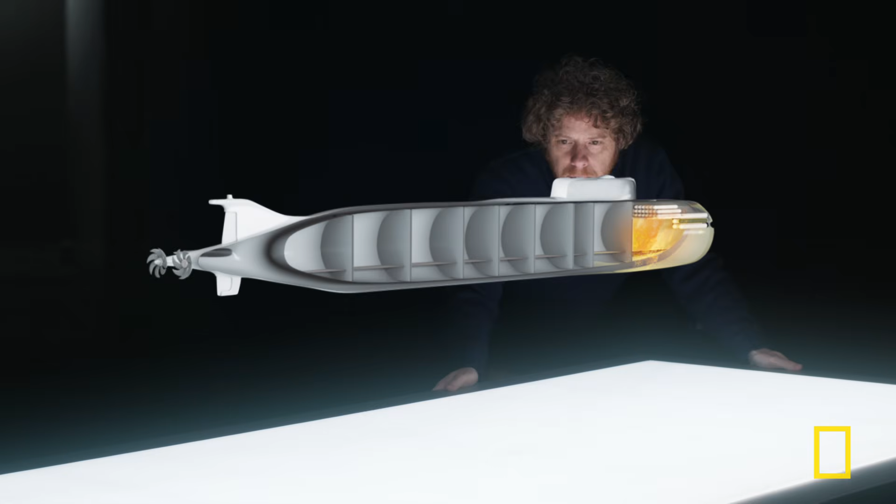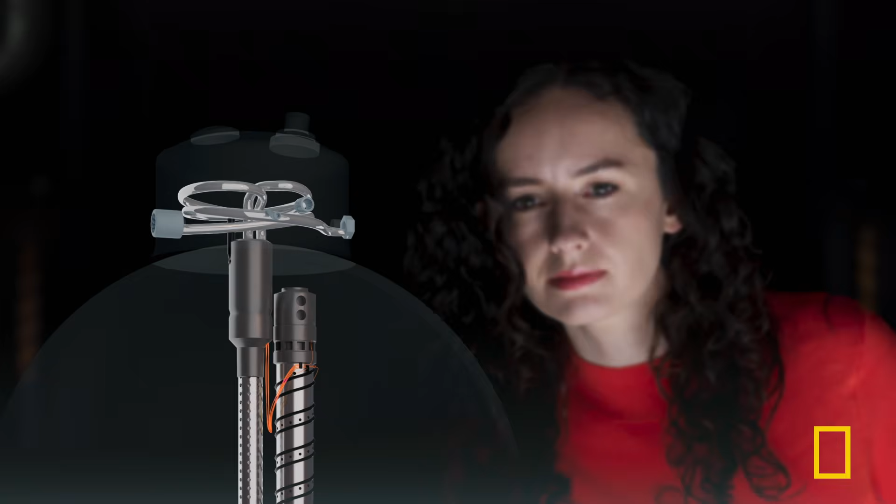Now, combining the latest research with every available source of evidence, experts will forensically analyze 3 disasters down to each tiny detail. You've really got to think outside the box. You have to work your way back and understand each link in the chain.

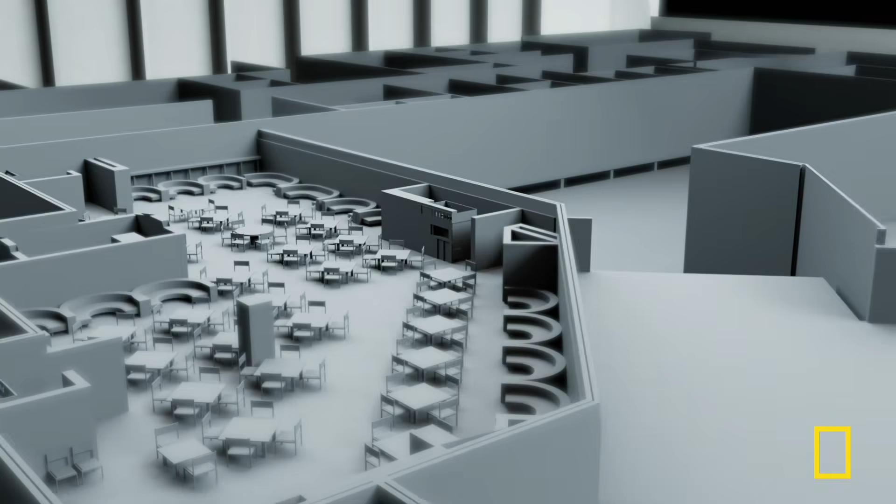State-of-the-art graphics reveal every critical detail at every critical moment. This whole disaster could have been averted. We can dissect them, get inside, or underneath, freeze time, and even reverse it.

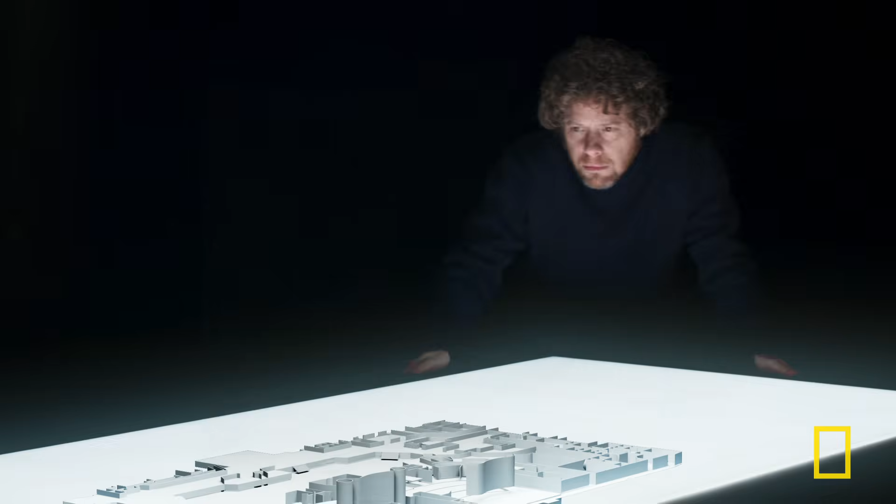To conduct a complete disaster autopsy.

Europe, the Alps. At 15,766 feet, Mont Blanc is Western Europe's highest mountain. Deep inside the solid rock runs a road tunnel more than 7 miles long, connecting France with Italy.

When it opened in 1965, it was the world's longest road tunnel. There are 2 carriageways about 12 feet wide, and you'll be able to drive under Mont Blanc in less than a quarter of an hour.

By the late 90s, about 2 million vehicles were going through the tunnel every year. The tunnel is carefully designed to keep these drivers safe. There are smoke and heat detectors throughout the length of the tunnel, refuge rooms with their own independent air supply.

We also have emergency telephones and fire extinguishers at regular intervals. Even today, the Mont Blanc Tunnel is an extraordinary feat of engineering.

But on March 24th, 1999, the safety systems fail. A lethal fire breaks out deep inside the tunnel.

It took more than 2 days for it to be put out. 39 people die. It is one of the deadliest road tunnel disasters in history.

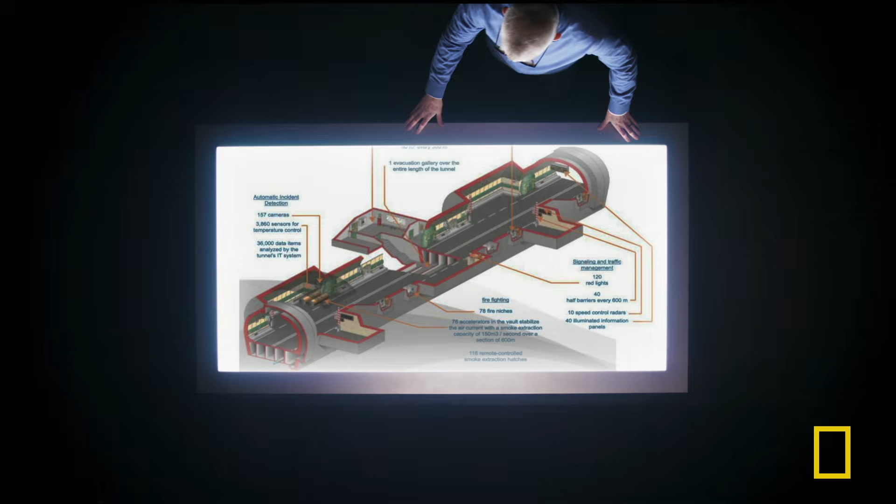Now, by analyzing all the available evidence, we will digitally reconstruct the Mont Blanc tunnel disaster to answer the question: what went wrong?

We have a range of evidence that we can look at to understand this fire. There's the remains of 36 vehicles that were left inside the tunnel after the fire. We have eyewitness accounts, and we also have data from an array of sensors that were located within the tunnel.

The first evidence of the disaster comes from one of these sensors. At 10:52, a smoke detector at rest area 18 triggers an alarm in the control room at the French end.

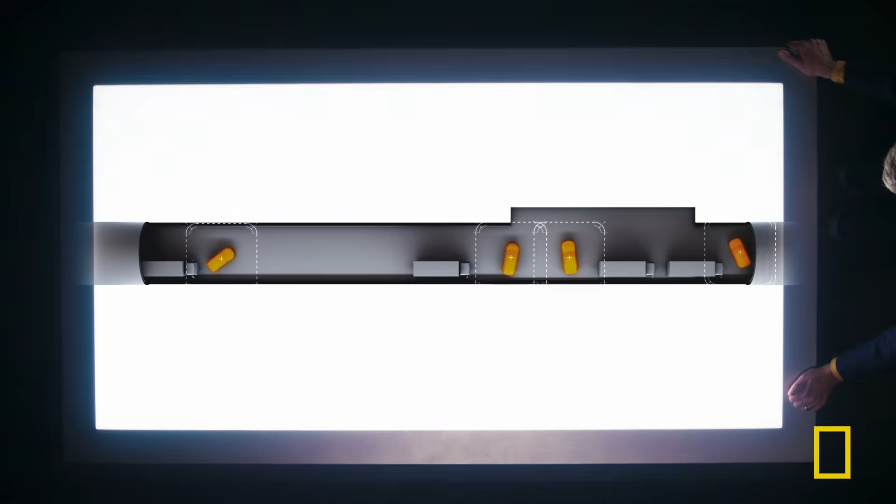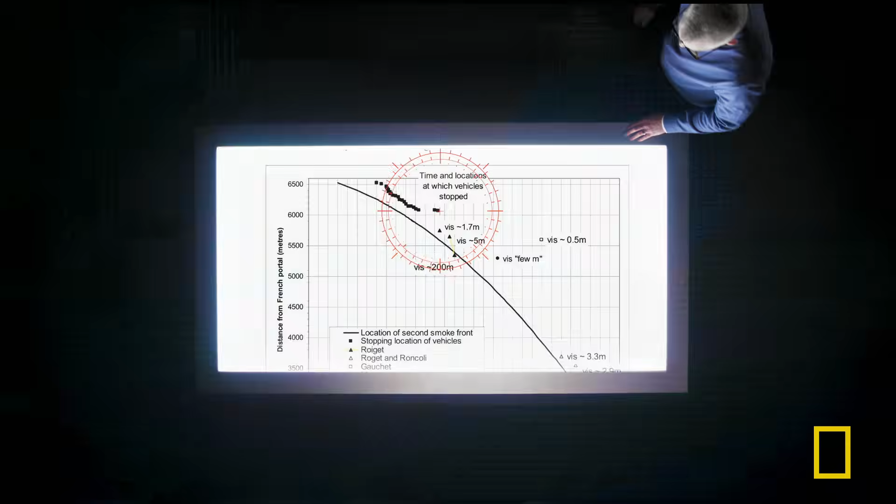But there is a curious pattern to these fatalities. Every single death is on the French side of the truck fire. Not one person dies on the Italian side. Why? Data from the smoke detectors shows that the smoke was traveling at about 4.5 miles an hour in the region close to Degraves' truck, but it was approaching 15 miles an hour as it got close to the French portal. This evidence shows the smoke accelerating away from the Italian side.

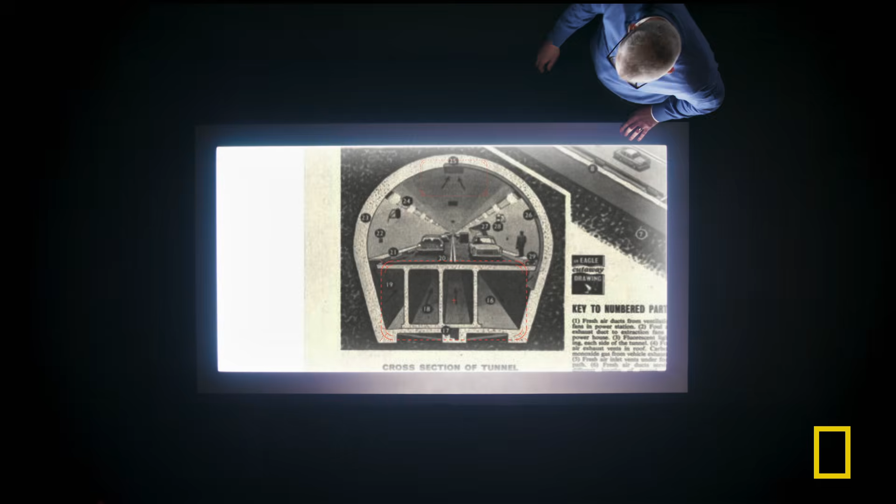What could cause the smoke to behave like this? Plans for the tunnel show that it is designed with 5 ventilation ducts on the French side and 5 identical ones on the Italian side. Whilst 4 of the ventilation shafts could only work in one direction, ventilation shaft 5 could be switched over from exhaust to supply.

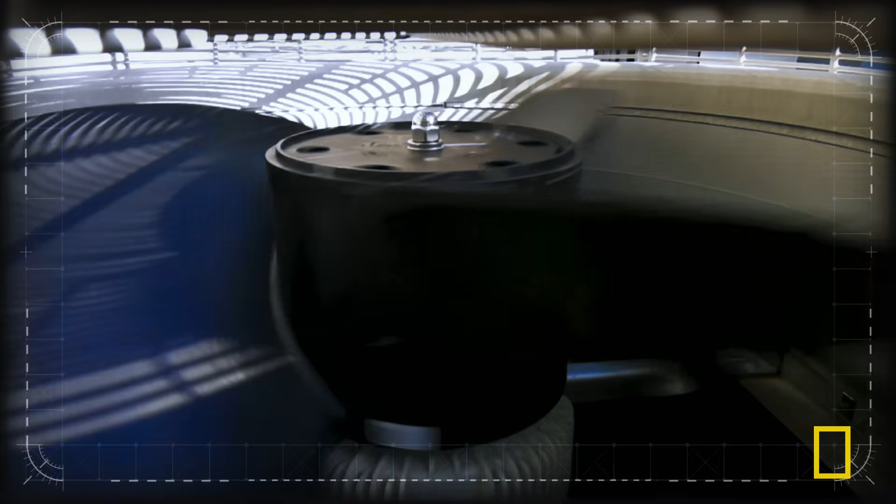Witness reports show that the Italians in the control center saw people fleeing the tunnel at the Italian side. They turned on a supply of fresh air through duct number 5. But according to eyewitness reports, on the French side, the number 5 fan remains set to exhaust. The Italian side is now blowing air in, the French side is sucking it out. By supplying air at maximum flow rate through duct number 5, this is creating a flow of smoke towards the French side.

So the evidence suggests that this fast-moving smoke may have led to unintended loss of life on the French side. One final question remains: what starts the fire in Degraves' truck?

According to the statement of truck driver de Graaf, he first sees smoke in the Mont Blanc Tunnel coming from under the cab of his truck. In de Graaf's truck, the engine was positioned below the cab, so the fact that he could see smoke coming out from beneath him suggests an engine fire is a potentially likely cause.

Other drivers say that they saw smoke from de Graaf's cab shortly after he entered the tunnel. This suggests that the fire started either shortly after de Graaf entered the tunnel or even before he entered it. Is it possible for de Graaf's engine to catch fire on the approach to the tunnel?

The answer may be simple geography. The tunnel is in the Alps, and the Alps are the highest mountains in Europe. You have to climb a 2.5-mile winding road, taking you up to 4,000 feet of altitude. So imagine driving your truck, pulling a heavy load, particularly as the air gets thinner at higher altitude, and your engine's having to work harder and harder.

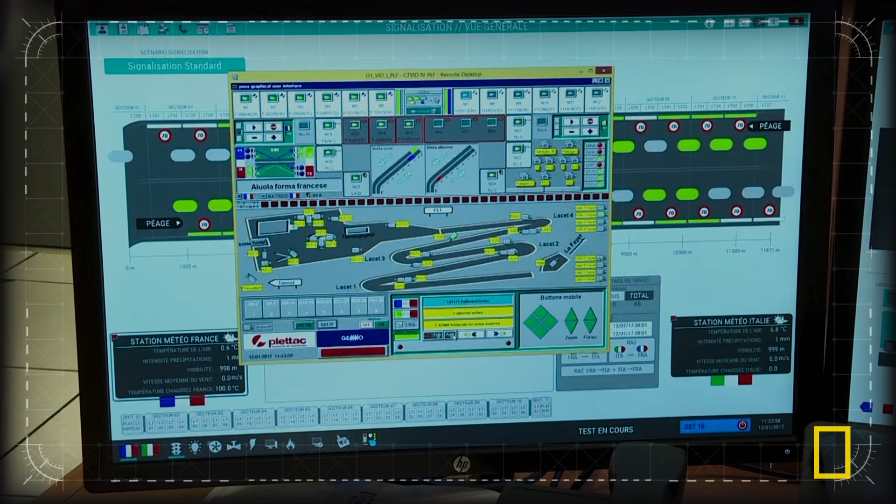After the fire, the tunnel is closed for almost 3 years. Its safety features and operations are completely overhauled. Sensors are installed at the tolls that can detect if trucks are overheating, even before they get into the tunnel. There's now a new underground escape tunnel with a separate supply of fresh air running the length of the tunnel. One key change is a single fire station in the middle, overseen by a single authority.

Disaster can strike in places we least expect, on a car journey through the Alps, or something as apparently mundane as a shopping trip.

Seoul, South Korea, 1995. The Sampoong department store is a towering, bright pink symbol of South Korea's commercial success. It is located in the heart of one of the city's most desirable and profitable locations. People flock to it. The Sampoong shopping center had been open for just under 6 years, and served over 40,000 shoppers a day, bringing in just under $4 million a week.

June 29th, 1995 is typically busy. There were over 1,000 shoppers in the center, parking their cars in the basement, eating in the food court on the upper floors, and just shopping in between.

At 5:57 p.m., the north wing collapses. The packed store is reduced to rubble in less than 20 seconds. More than 900 people are injured. 502 are killed. This was the worst peacetime disaster that South Korea had ever experienced.

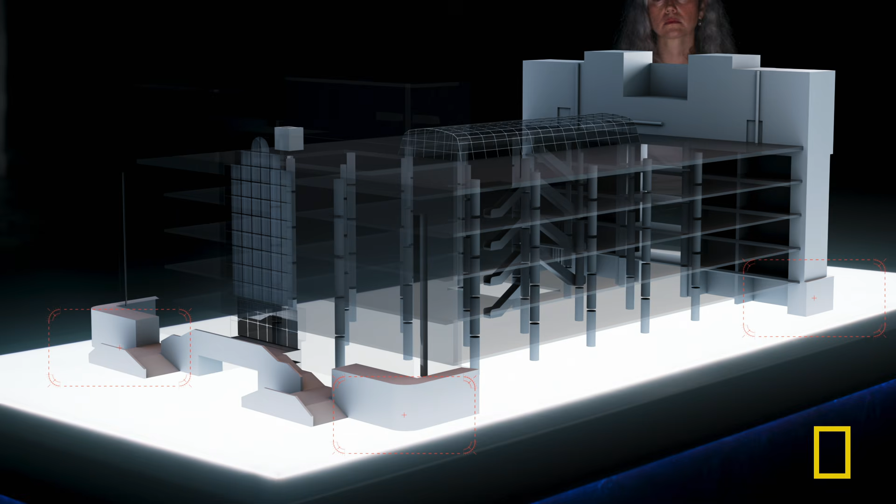When a building falls, the foundations that underpin the entire structure are always a prime suspect. And Sampoong building records point to a possible problem here. The Sampoong department store was built on a landfill area, so it's plausible to think that the ground was unconsolidated and not stiff enough, causing some problems with the structure. Is that theory supported by the evidence?

When we look into the photographic evidence, there's nothing that suggests there were problems with the foundations. In fact, many people only survived because they were in the basement. This suggests that the cause of the collapse is not in the foundations or basement.

That is supported by a critical witness statement from a security guard. If the ceiling caves in, the collapse must begin above. The building collapses onto the basement. It's a miracle anyone down there survives.

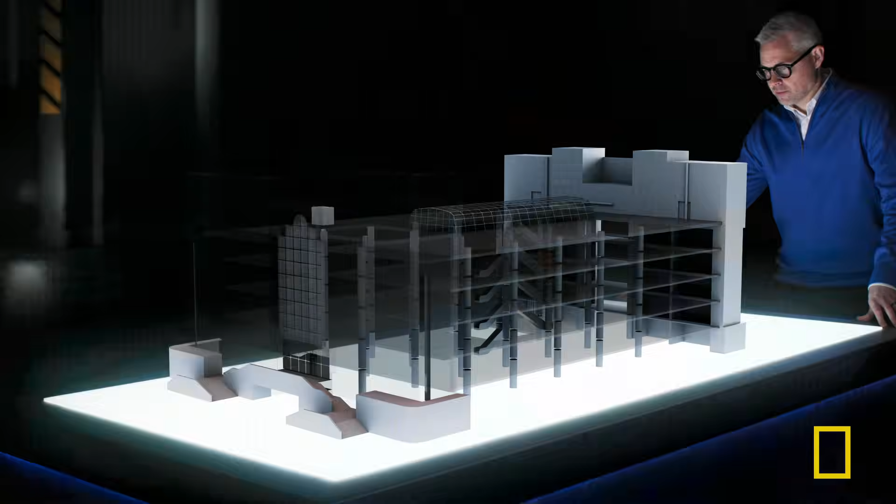Could there be a flaw in the design of the entire building? The collapsed Sampoong department store is built using what's known as a flat slab structure. A really common way to design a multi-story building is to have flat concrete slabs, one on top of the other, supported by columns. These columns sit right on top of each other in order to funnel the loads from the top of the building straight down into the foundation in a continuous way.

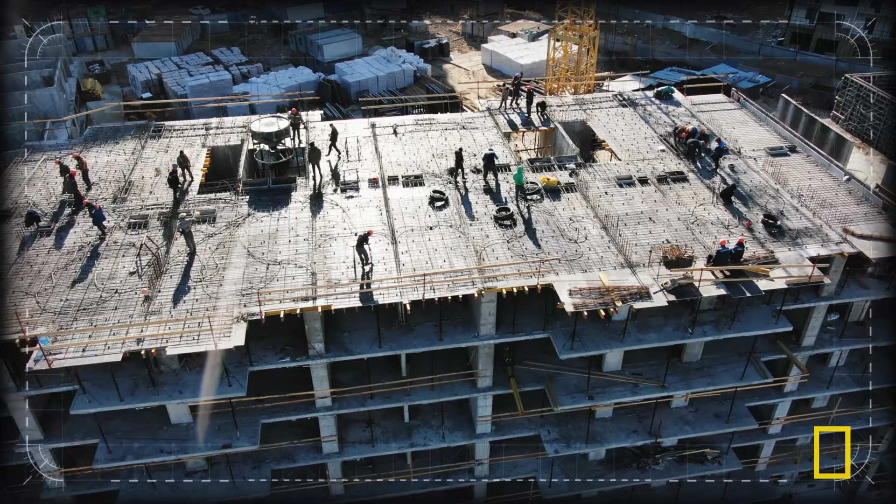Flat slab construction is used all over the world. If you abide with the rules and if you are careful with the detailing, it works perfectly fine. There is nothing suspicious about the way Sampoong is designed. Could there be a problem with the way it is built?

One clue could lie in the evolution of the building's purpose. Sampoong department store wasn't initially conceived as a department store, but it was envisaged as an office building. Only after the first set of approvals, it was changed to a commercial building. The engineering design of a department store is fundamentally different to that of an office block.

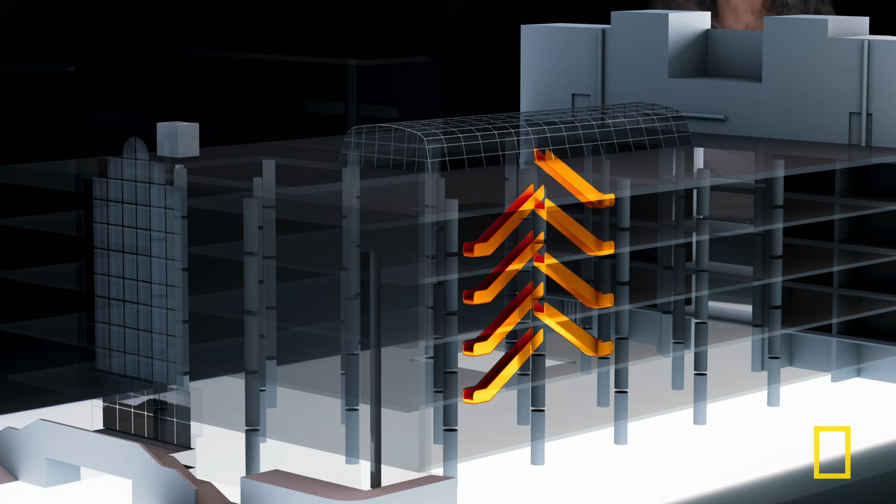For a start, an office block generally uses elevators, but a department store needs big escalators. They need big holes in the concrete floor slabs. These not only weaken the design, but they require fire shutters to prevent fire spreading upwards through these holes. These shutters are not part of the original design. Fitting them requires further concerning changes.

They not only had to take large chunks of the slabs off, but they also, on several levels, had to trim some of the columns. These are the concrete columns that are holding the building up. These types of alterations will significantly weaken a flat slab structure, but in this case, they were all within the bounds of what was permitted within the building regulations. They shouldn't cause the structure to collapse.

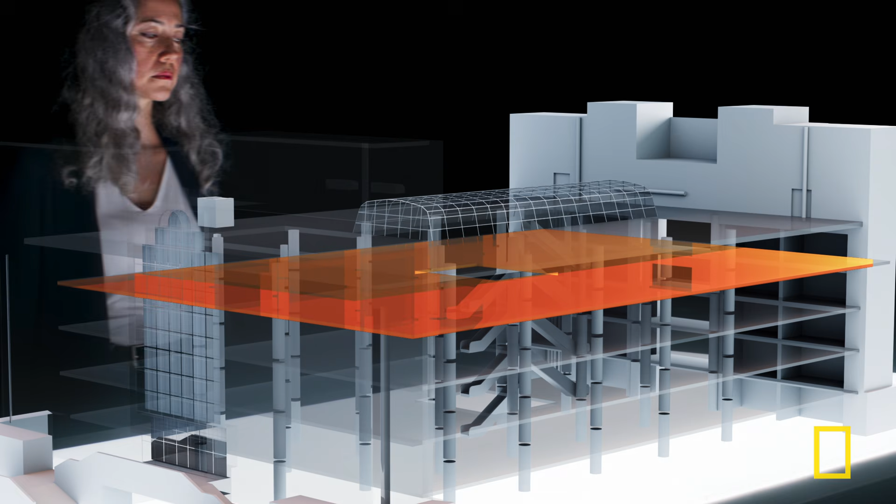So there must have been something else going on. There is another clue in the history of the building to what that could be. When it was first designed, it was a 4-story building, but when it finished, it had 5 stories above the ground. So you have this 5th floor put on top of an already weakened structure. An entire extra floor. Could this explain the collapse?

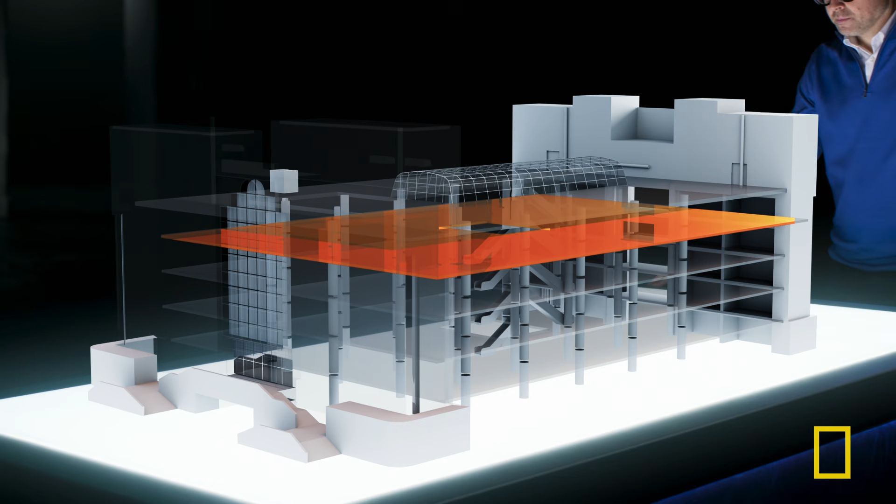According to building records, the new top floor is intended to be lightly loaded. This will reduce the additional load on the building beneath. In the initial drawings for the 5th floor, it shows a roller rink at that location. A roller rink, of course, is a mostly open space with only the weight of people roller skating around on it. But this lightly loaded design is never built.

After approval had been granted, the use changed and it was turned into a restaurant floor. And that's nothing like a roller rink. A restaurant, of course, has tables and chairs, the people who are eating, and sometimes some pretty heavy equipment in order to provide those services.

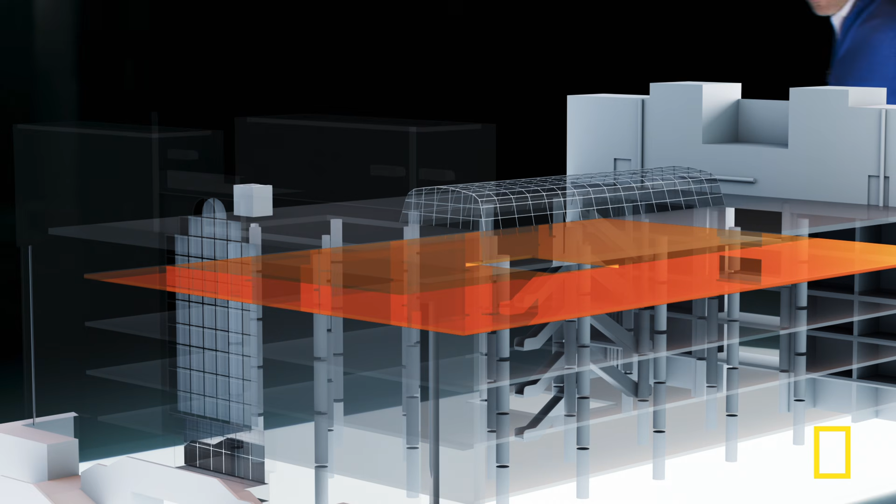This fundamentally changes things. The structural load calculations for the roller rink suggested it would need to support about 1 ton for every square meter. When it's changed to a restaurant floor, the load goes up to about 1.5 tons per square meter, but they don't recalculate. And that's a very significant increase in load.

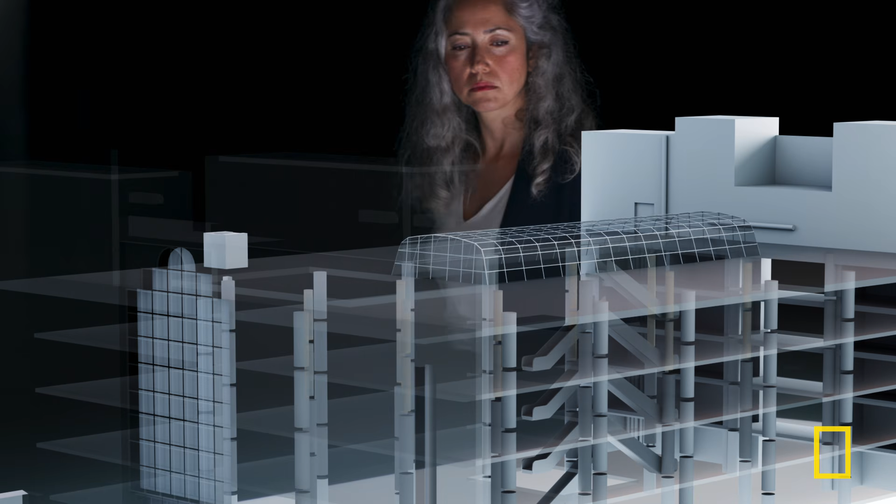Photographic evidence from the site reveals clues that this additional floor was inherently weaker than the floors below. A big divergence from the original design was that the columns were supposed to be 80 centimeters in diameter with 16 rebars. But the 4th and 5th floor columns weren't like that when the building was finished. Rebar is the steel reinforcement buried inside the concrete columns. 8 of the 16 columns had been reduced from 80 centimeters diameter down to 60 centimeters diameter, and the amount of reinforcing steel in the columns had been cut in half.

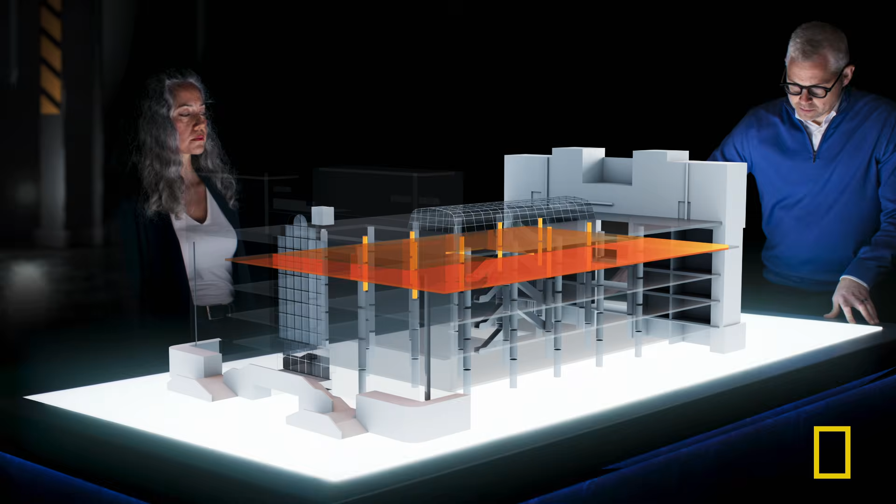That decision has consequences. Reducing the column sizes is going to make the structure weaker. The reduced diameter also means the same load is pressing on a smaller ceiling area. This increased pressure can lead to the columns literally punching through the floor above. It's known as a punching shear failure.

Analysis of photographs of the wreckage site clearly shows this has occurred. Steel reinforcement was originally in the floor slabs at right angles to the column, but as the column punched through the floor slab, it has been twisted through 90 degrees and bent over against the column. This is unequivocally punching shear failure.

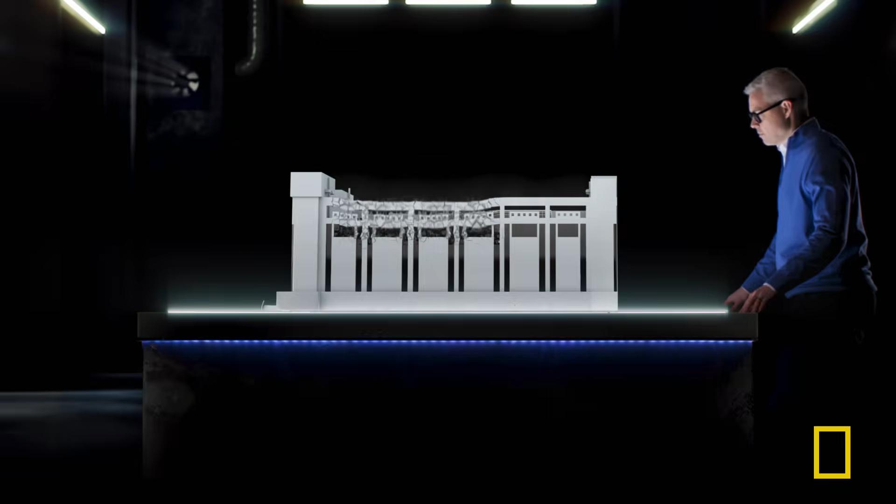Despite all its many flaws, Sampoong stays up for 6 years. What triggers the actual collapse? An eyewitness statement from a cook working in a 5th floor restaurant provides a vital clue. As he runs into the emergency stairs, the ceiling above him collapses. There is only one thing above the 5th floor ceiling: the roof.

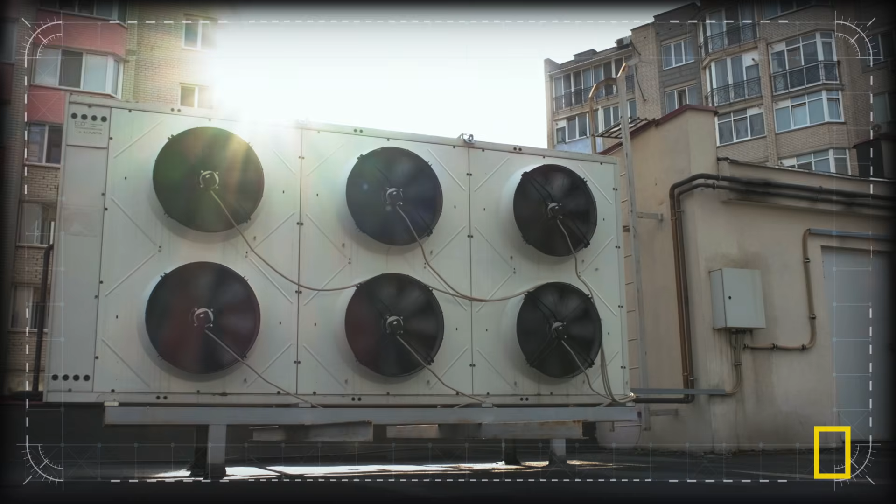Analysis of aerial images from 1989, the year before Sampoong is opened, shows yet another unauthorized change to the design: AC units. They decided to install very large air conditioning units on the roof, and there's no mention of these in the original design.

The commercial AC units at Sampoong weigh 15 tons each, but when operating, they are filled with water. This doubles the weight to 30 tons, and there are 3 of them. Once the structural plans were submitted and approved, these units were brought in, which brought considerable additional weight on top of the structure.

This aerial image shows the AC units are originally placed on the east side of the building, but images from the wreckage clearly show them sitting on the west side. These massive 15-ton units have been moved. Could this be the trigger for the collapse?

Around 2 years before the Sampoong department store collapses, records confirmed that the giant AC units on the roof are moved, following complaints about their noise. These are massive equipment and they are very heavy. What they should have done is bring a crane to lift it very gently and put it on the other side. But that's not what happens.

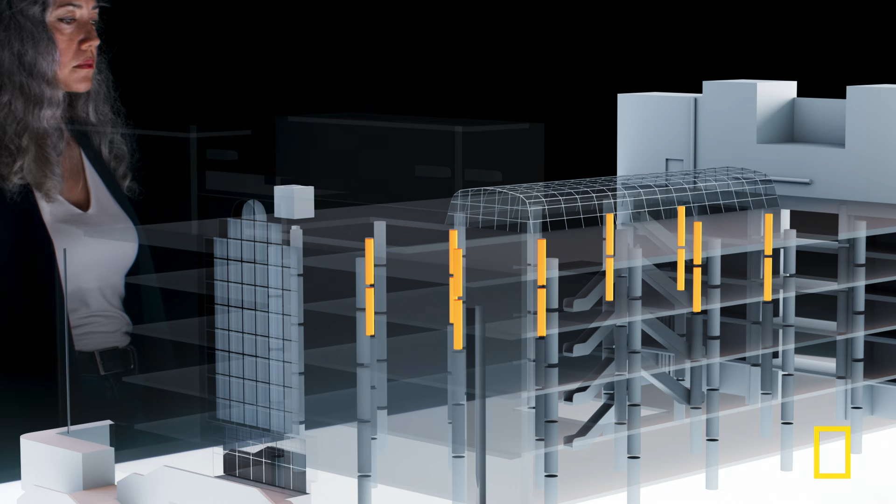Instead, the company moved the AC units by loading them onto wheels and rolling them across the roof, a roof supported on undersized columns. Eyewitness evidence suggests they cannot bear this concentrated load. Large cracks formed once the AC units were moved from one part of the roof to the other.

According to witnesses, one column under the AC wheels, column 5E, appears to suffer most. You have growing cracks over time, particularly around this column 5E. The fact that these cracks are concentrated around one of the columns could be signs of imminent punching shear failure.

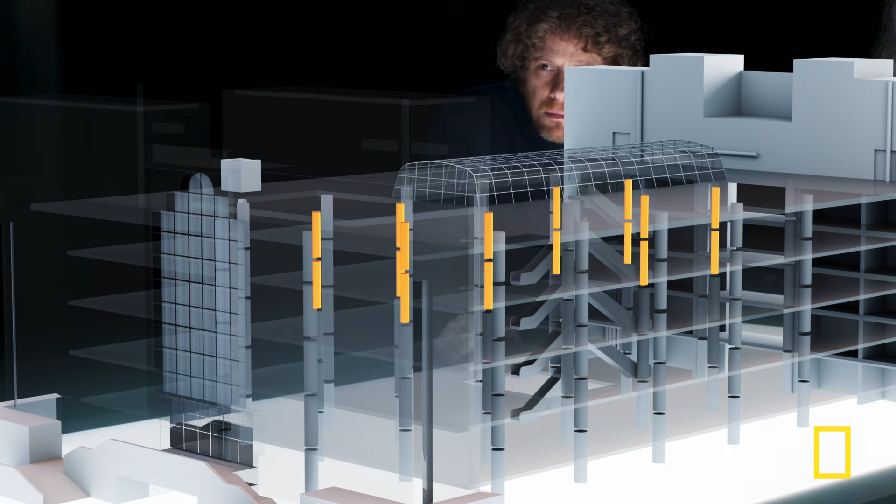We can now piece together the evidence to explain the Sampoong disaster. Around 2 years before the collapse, 3 15-ton AC units are wheeled across the roof. This overstresses undersized columns on the 4th and 5th floor. Cracks appear in the roof slab above these columns. These cracks are unstable. The crack width was increasing with the vibration from these air conditioning units.

The roof cracks created by the AC units continue to grow. There were multiple warnings over the 2 years following the movement of those air conditioning units about cracks in the 5th floor, but all of these were ignored.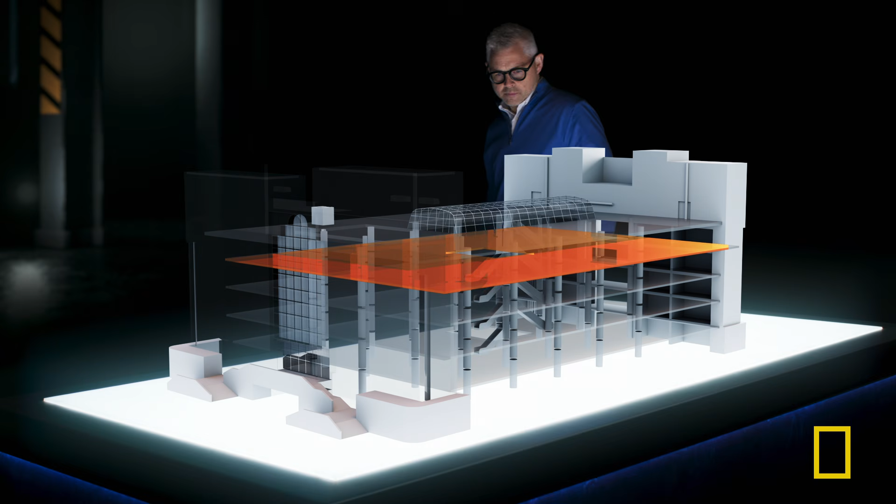At 5:57 p.m. on June 29th, the roof fails by punching shear, probably beginning at column 5E. Then you've got the weight of the roof, plus 90 tons of air conditioning unit that's all moving and impacts the floor below. The main structure, weakened by modifications for escalators and fire shutters, fails under the avalanche of collapsing floors above. That then falls down and continues the pancake collapse through the building. It takes less than 20 seconds for the entire building to come down.

Thousands are inside. 502 of them are killed.

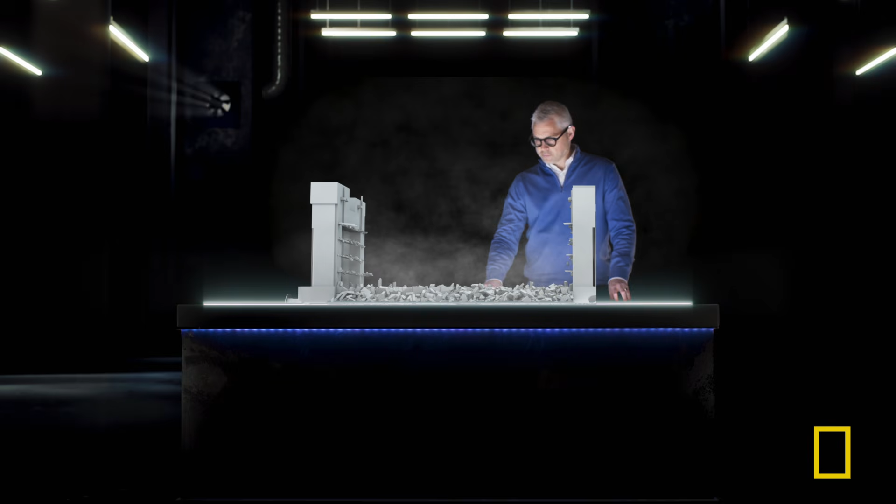In the aftermath of the disaster, the truth about how the building ended up so badly weakened finally comes to light. A subsequent investigation reveals that Jun Lee, the owner of the building, made these changes to the construction against the strong advice of engineering firms that were working on it.

Jun Lee is found guilty of criminal negligence and sentenced to 10.5 years in prison. His son, the CEO, is found guilty of accidental homicide and corruption and sentenced to 7 years. All told, 12 officials are found guilty of corruption as a result of this catastrophe. The Sampoong building collapse has a profound effect on Korean society.

The public is shocked by the catastrophe, and months of protest, including street clashes, follow the incident. A countrywide program of building investigation reveals that hundreds of buildings are in serious violation of safety and engineering codes, and several are on the verge of collapse. The ultimate conclusion of the government inquiry is that only 2% of the high-rises actually meet the safety codes.

The Sampoong building collapsed in front of people's eyes. But some disasters happen without anyone noticing.

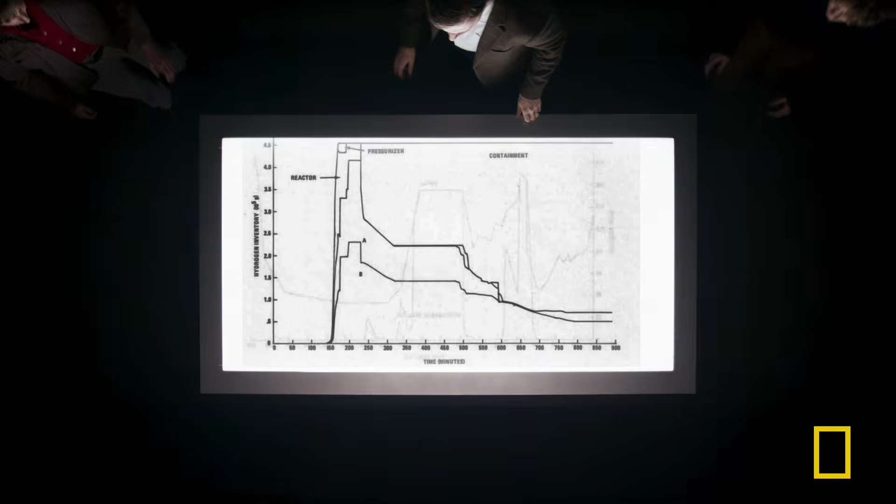Using eyewitness statements, data from the control room, and the remains of the damaged reactor, we will digitally reconstruct the disaster. How do things go so catastrophically wrong?

No one spots the first signs of disaster at the nuclear plant on 3 Mile Island. 3 Mile Island's problems begin with something relatively minor. According to plant operation logs, it begins in the unit housing reactor number 2. Using data from the accident, we can digitally dissect what happens in this part of the plant.

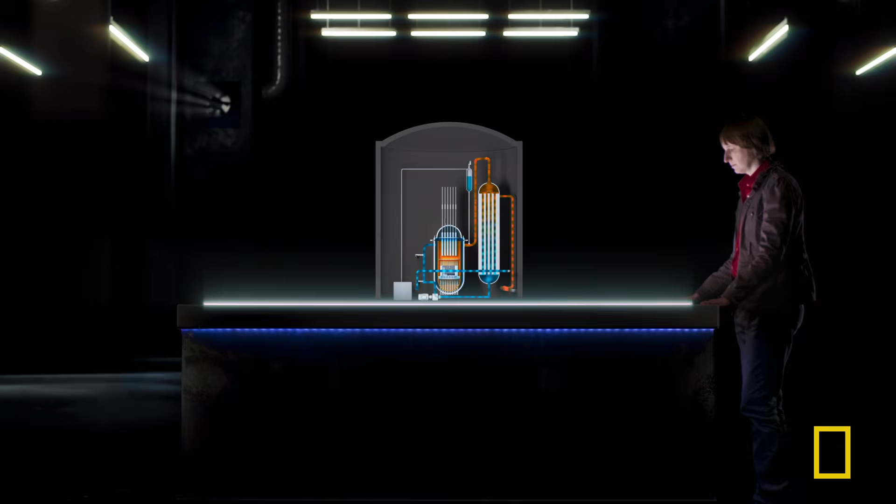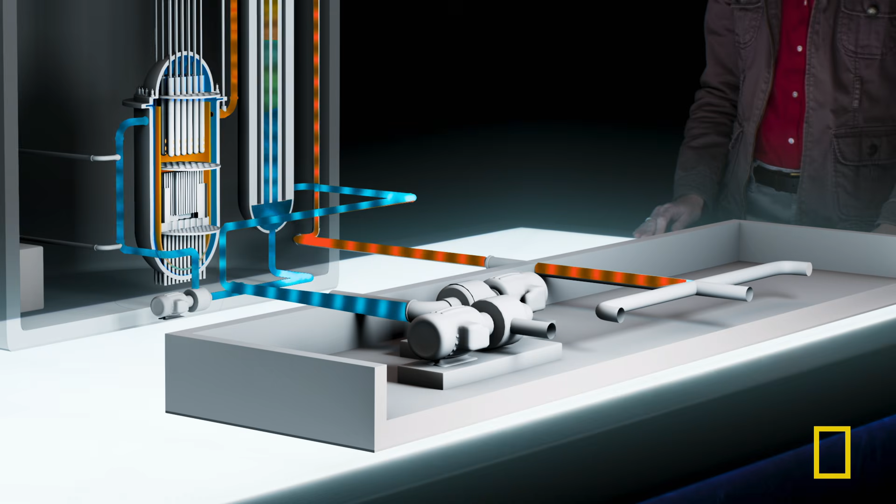Operators initially report a fault with the feedwater pump. This is part of the system that generates steam for the electricity generators by extracting the incredible volumes of nuclear heat from water surrounding the reactor's core. According to the logs, at 4 a.m., the feedwater pump stops working. The problem is, cooling water is absolutely essential to keep the reactor safe.

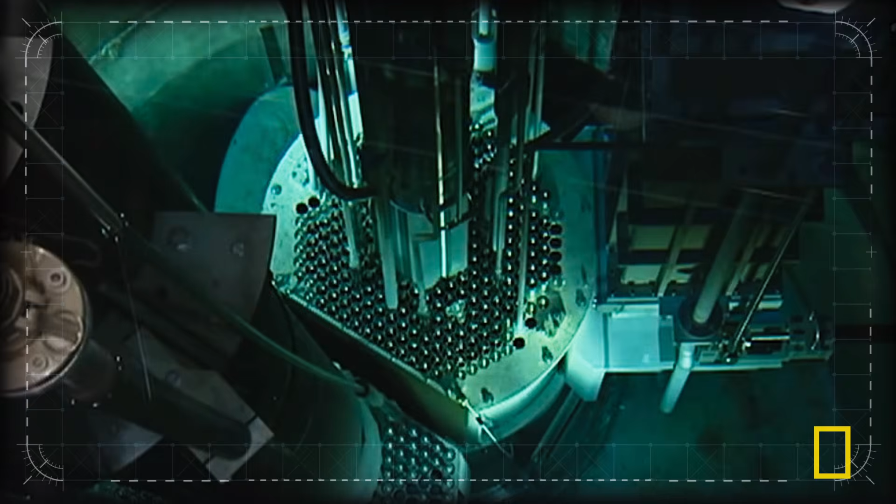A nuclear reactor is a little bit like Goldilocks. It has to be just right. If you produce too little heat, then you're not going to produce steam and you're not going to drive the turbines. But if you produce too much heat, that's even worse because then you get a meltdown. So as long as you keep extracting the heat as fast as it's being produced, everything's fine.

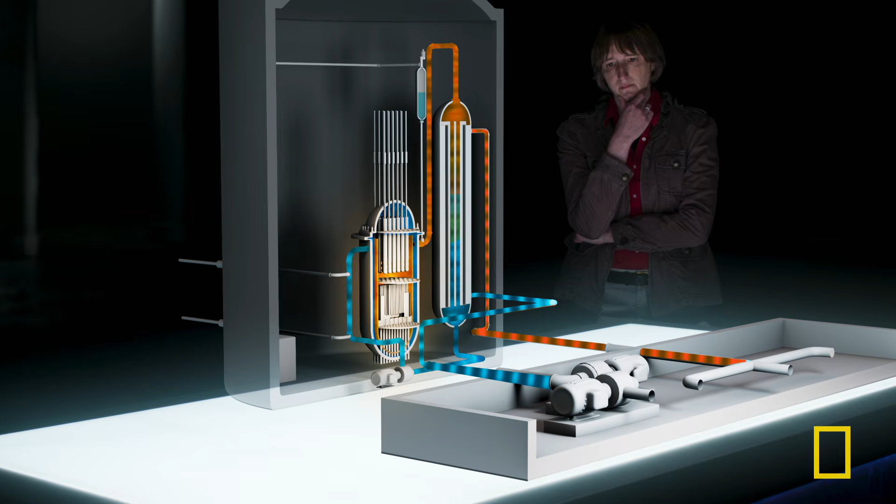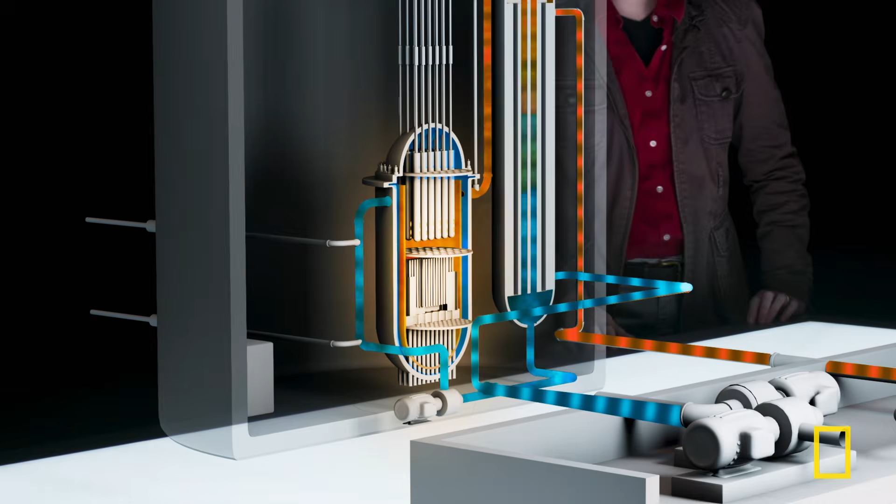With no cooling water flowing, the huge quantity of heat continuously generated inside the reactor is no longer being removed. Now, by itself, the cooling water pumps failing shouldn't have been a big problem. There are backup pumps. In the control room, they could see that lights had come on, saying that the backup pumps were working, which sounds like great news. But unfortunately, though the backup pumps were running, the water wasn't actually flowing.

What goes wrong with the backup pumps? Maintenance records show that a few days earlier, there'd been some testing carried out, and those tests required the pump's valves be shut, and they simply weren't opened again. As far as the control room is concerned, the backup pumps are working. They have no idea that the reactor isn't being cooled down anymore.

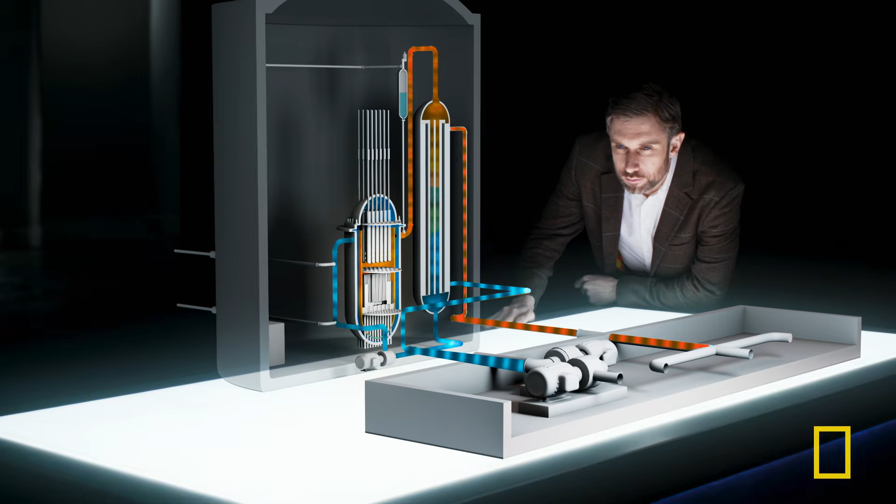That delicate balance that's so essential for a nuclear power station to work is still producing all that heat, but it's not being taken away. And this is a disaster waiting to happen. But there are multiple layers of safety systems in the 3 Mile Island reactor. Why don't those protect the plant?

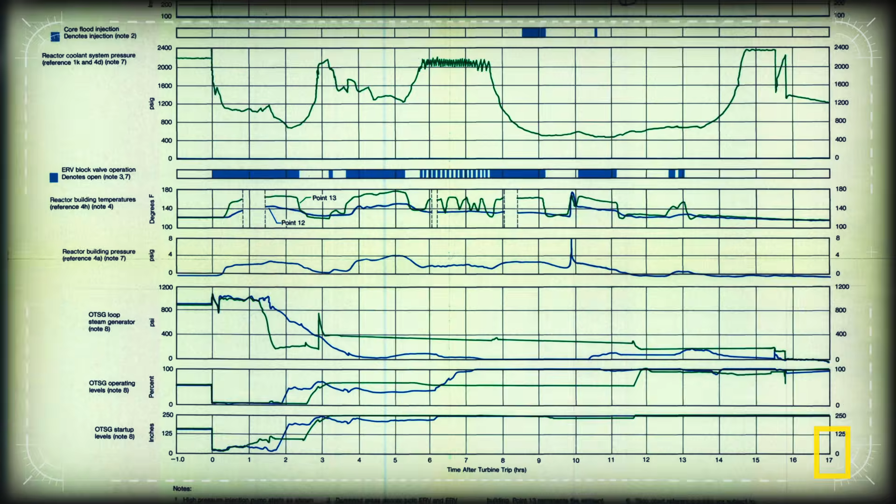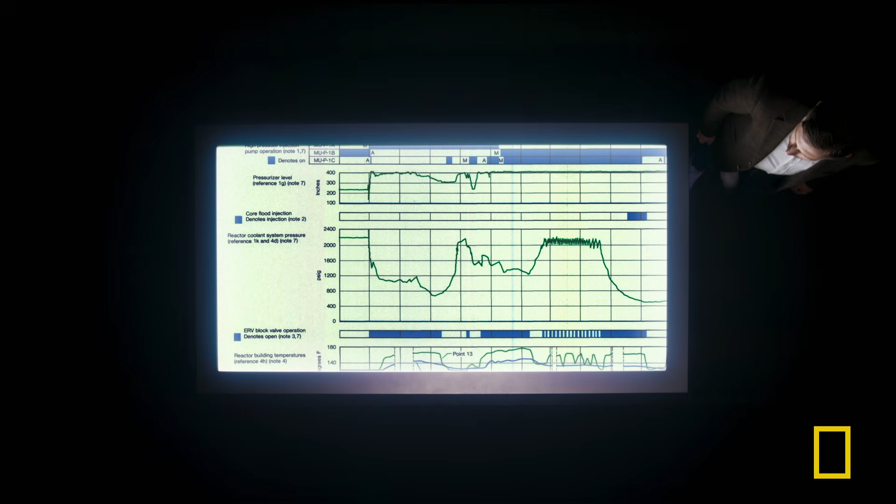According to the plant's logs, just 3 seconds after the pump failure, pressure and temperature within the reactor start to climb because of the vast heat being generated by the nuclear core. As the temperature inside the reactor increases, the water inside starts to expand, and that increases the pressure inside the reactor. Excess pressure is dangerous, so this event triggers another automatic safety system.

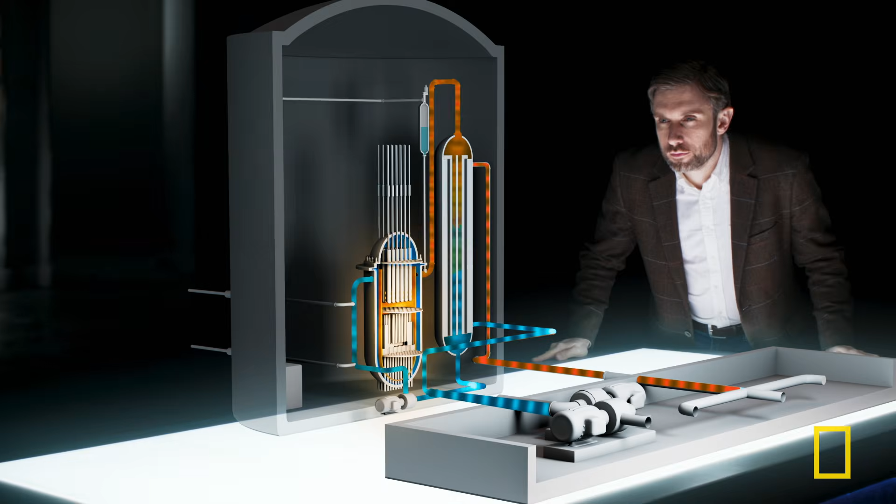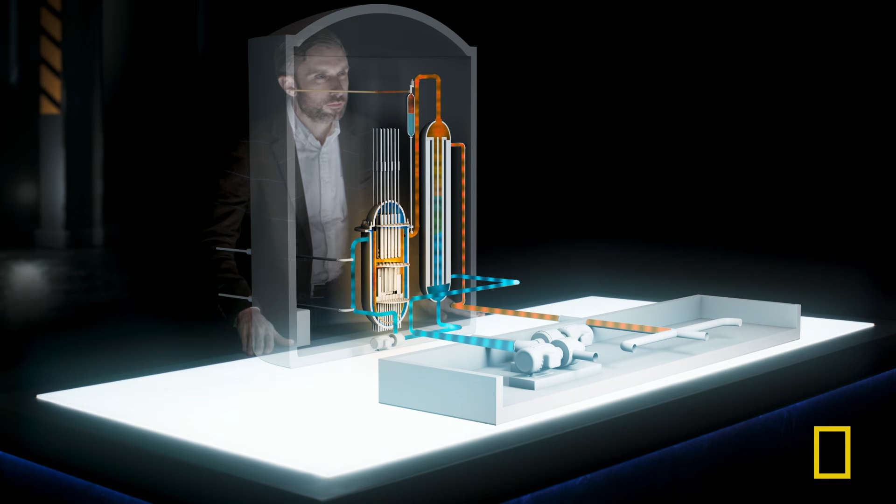The plant logs record that 3 seconds after the pump stops, a safety valve responds to the rising pressure by opening. This extracts reactor coolant to reduce the pressure to safe levels.

The log shows that 5 seconds after the valve opens, another safety system is triggered. The reactor's control systems notice this increase in heat and decide to lower the control rods. And what that means is they're absorbing some of the neutrons, damping down that nuclear reaction, and removing the main source of heat inside the reactor.

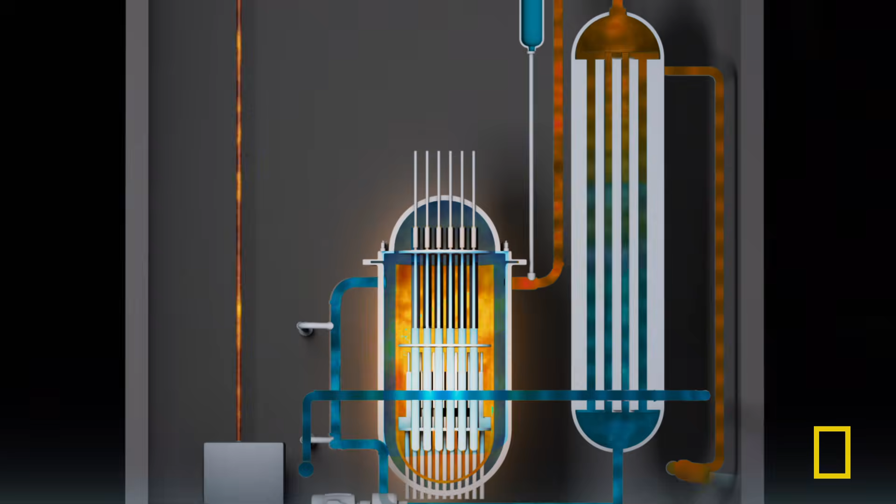These safety systems are triggered automatically, exactly as designed, and exactly as the control room operators expect in the rapidly escalating situation. After 13 seconds, pressure in the reactor chamber drops back to safe levels. The safety valve has done its job, and the light indicating that it is open goes out.

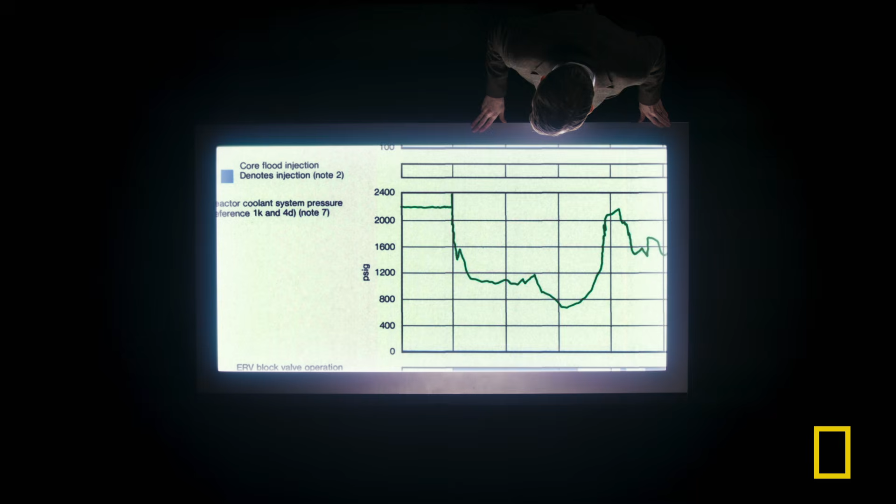What we know from the operators in the control room was that there was a light on the control board that they thought meant that the safety valve was shut. But that doesn't fit with plant records. They show that the pressure in the reactor continues to drop. Yet the indicator light is telling the operators that the safety valve that initiates the pressure drop is now closed.

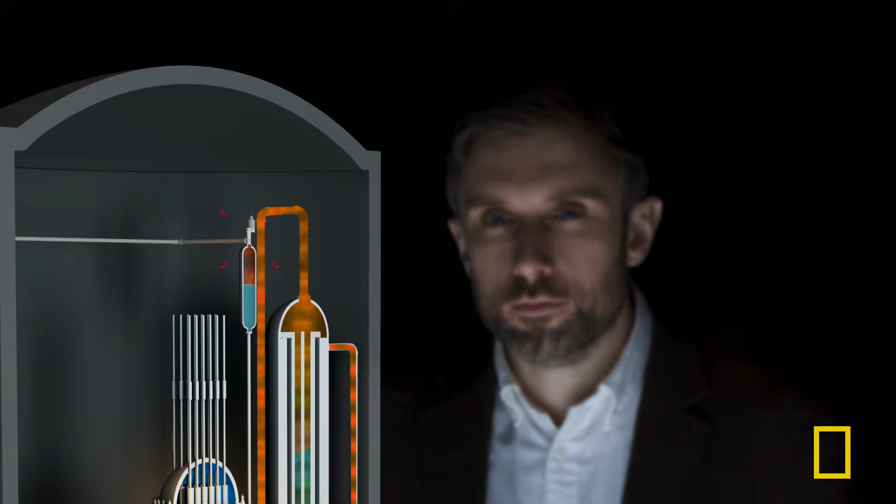But plant schematics tell a different story about this indicator light. The command has been sent to the safety valve, but that light doesn't give any indication whether the valve has actually obeyed that command that's been sent. The indicator light tells them nothing about what the valve itself is doing.

And that means there's a very simple explanation for the fall in pressure. The safety valve isn't closed at all. It's stuck open.

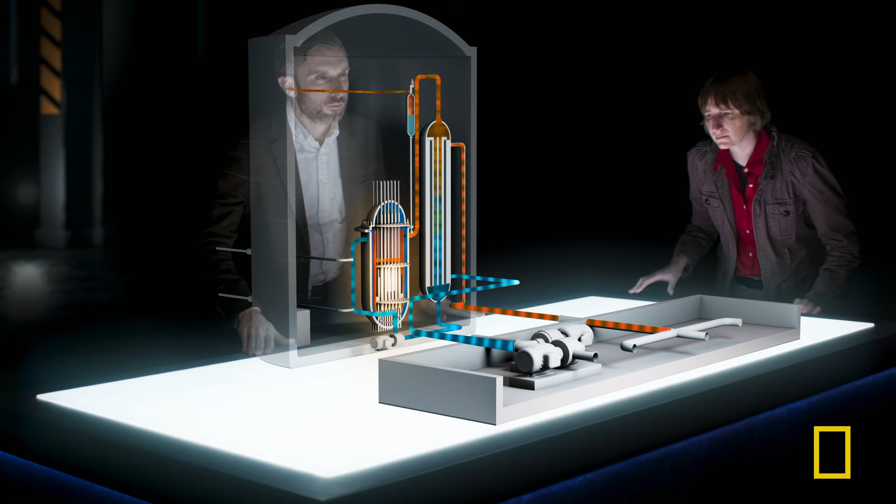Three Mile Island is designed to operate under pressure, but with the safety valve stuck open, the coolant was just going to boil off. It's going to disappear. Even though the reactor has shut itself down, it still needs coolant. The reactor is still producing a residual heat called decay heat, and that's going to continue for a while. And as long as it continues, you still need cooling water.

The temperature of the nuclear core is continuing to rise towards meltdown, and no one in the plant or in the nearby town has any idea that a nuclear disaster is looming.

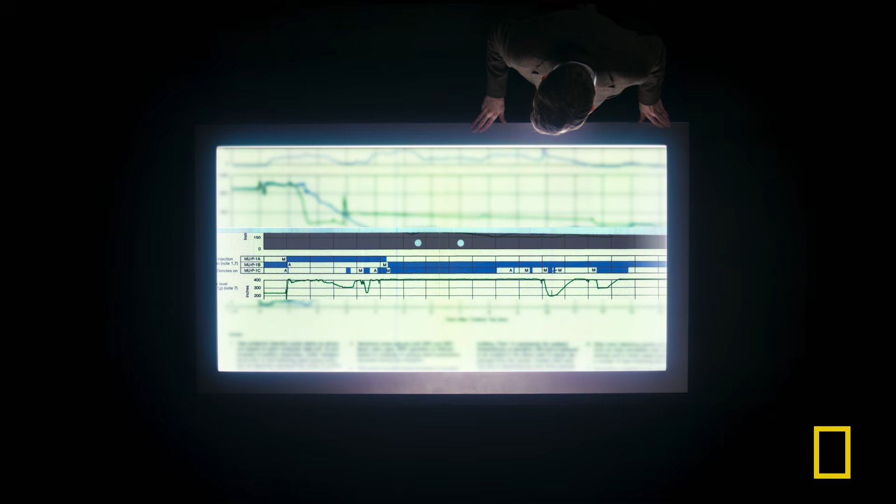The risk of a meltdown in a nuclear reactor is so serious that they created a system called the Emergency Core Cooling System as a backup system that floods the nuclear reactor in an emergency with high-pressure water. Logs show that as coolant levels in the reactor continue to fall, the emergency cooling system does start automatically.

But according to eyewitness testimony, a minute later, the operators shut it down. Shutting down the emergency cooling system is probably the single most dangerous mistake of this whole crisis. Why do they turn off such a vital system?

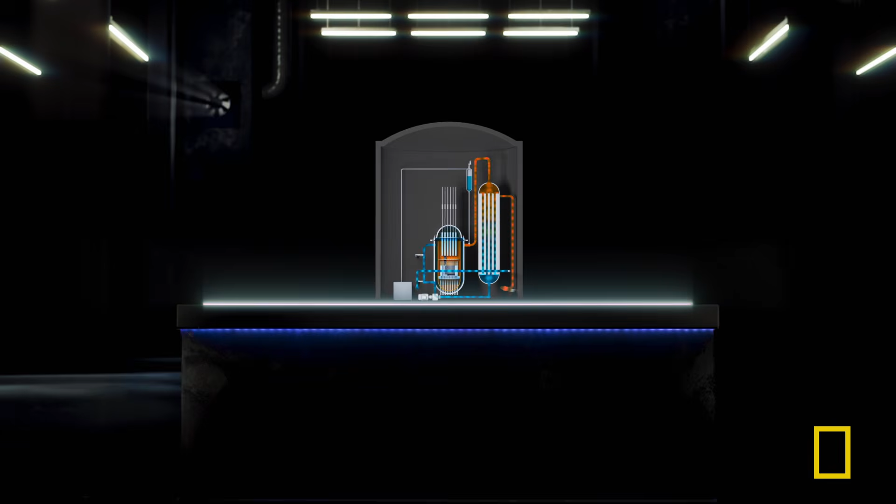Three Mile Island is heading towards nuclear meltdown, and nobody can see it. You can't look directly into a reactor chamber, and so for the operators in the control room to figure out what's happening inside the reactor, they have to look at all these switches and dials and gauges that they have on their control board and put the pieces of the picture together. And this time, they get it wrong.

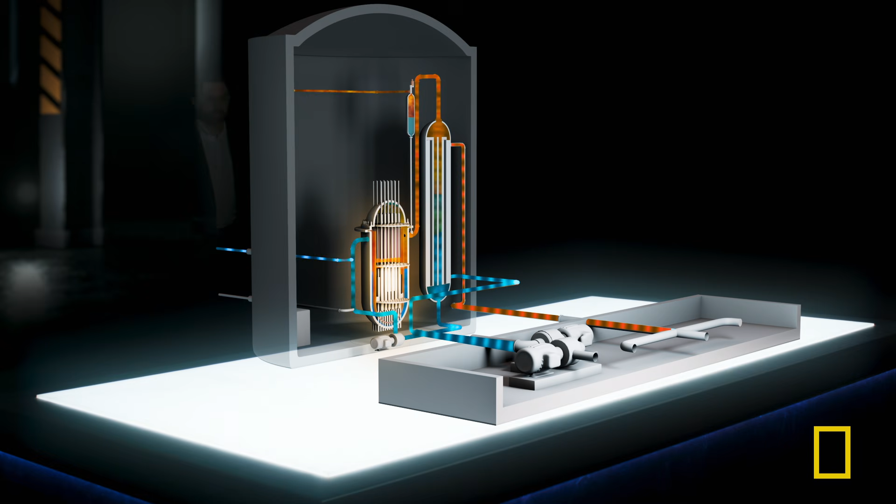What they think is happening is that the water level in another part of the water system is rising, and they've been told never to let that water rise too high. So what they do is they shut down the emergency core cooling system before it pumps in too much water. This is, in effect, the last line of defense against meltdown, and they have just turned it off.

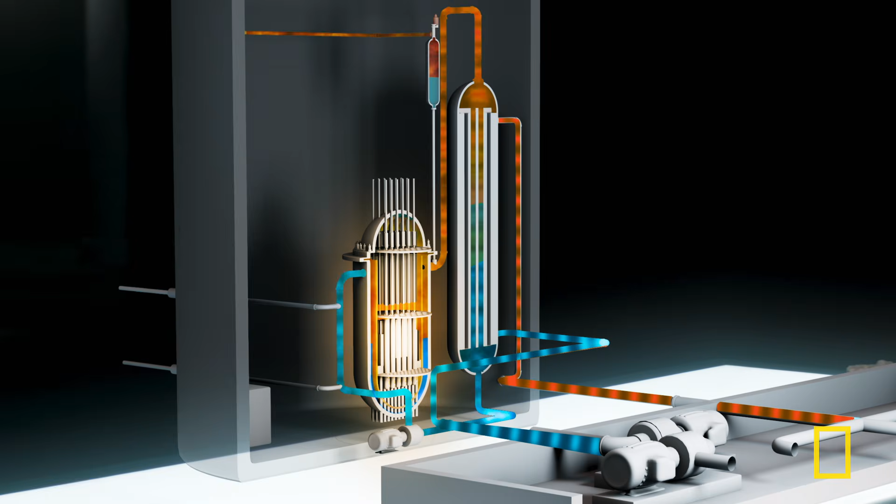Eyewitness statements suggest they then make the situation even worse. Still thinking the problem was too much water inside the reactor, they opened something called the letdown system, draining even more coolant from the overheating core.

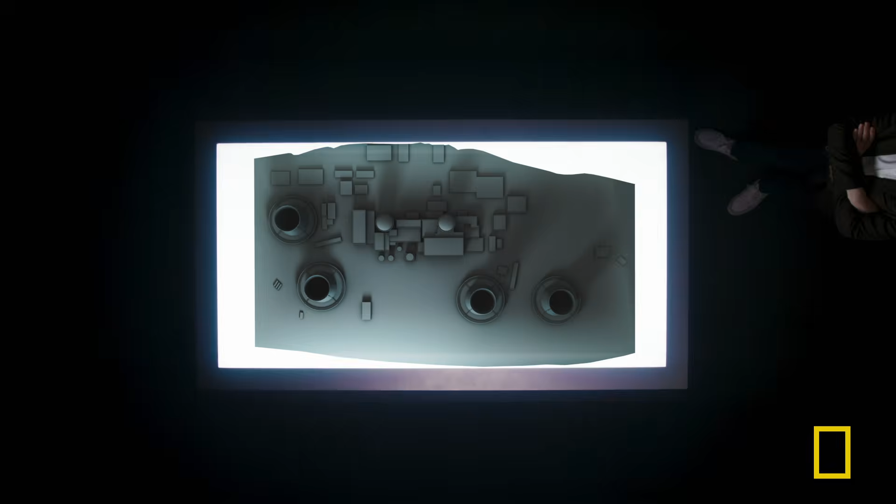Nearly 80 minutes after the crisis begins, the control room operators report loud vibrations coming from the reactor. Banging and crashing noises are really not what you want to hear from a nuclear reactor. And what's going on here is that the reactor coolant levels have gotten so low that the pumps are trying to circulate steam as well as water, and they're just not designed to do that.

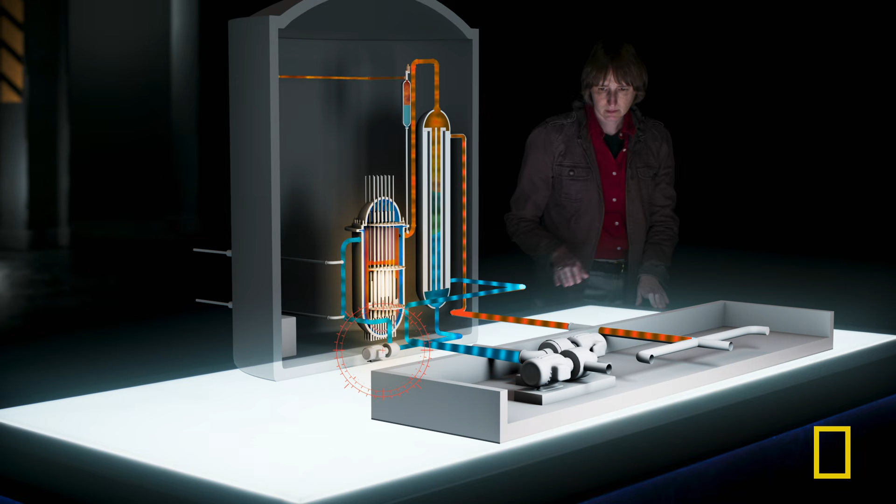This is now a rapidly deteriorating situation. The coolant waters are catastrophically low, but the operators just don't realize it. Instead, concerned that the pumps are being damaged, the operators shut them down.

This is terrible because it means there's actually no cooling water whatsoever now getting to the core. Throughout this whole crisis, precious cooling water continues to escape from the stuck safety valve. Based on the rate of coolant loss, we think that sometime around 6 a.m., two hours after the disaster started, the water level gets so low that it begins to dip below the top of the reactor rods.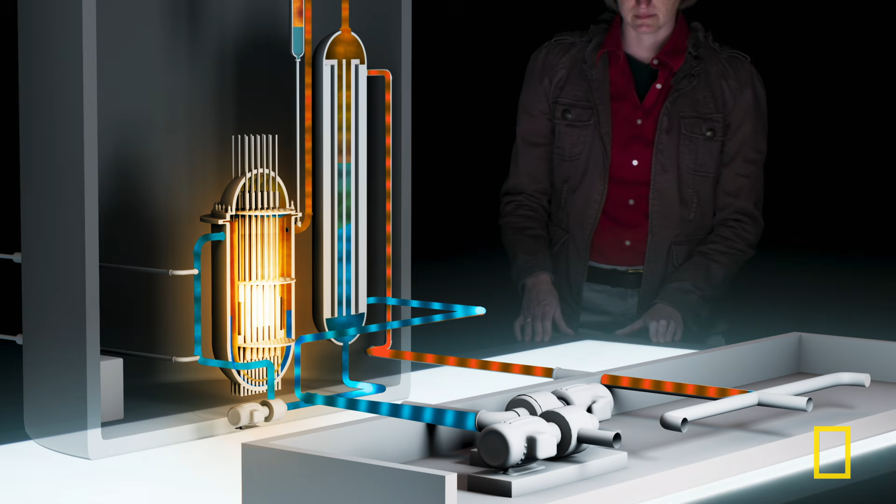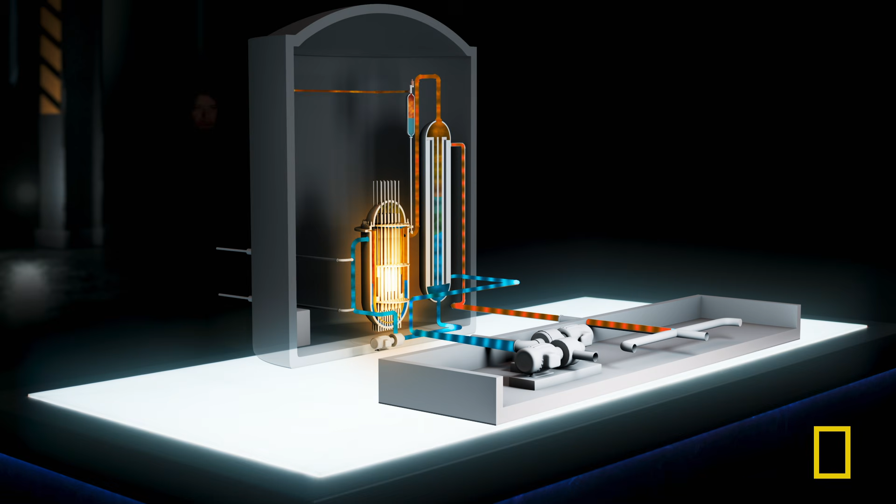Now things are getting really serious. This is the beginning of a core meltdown, exactly what causes the Chernobyl disaster. Temperatures in the reactor are becoming so high that the nuclear fuel rods are melting, forming a horrible radioactive slag known as corium, which starts making its way down to the bottom of the pressure vessel. If the white-hot corium melts through the steel reactor container, huge quantities of radiation could pour from the plant for years.

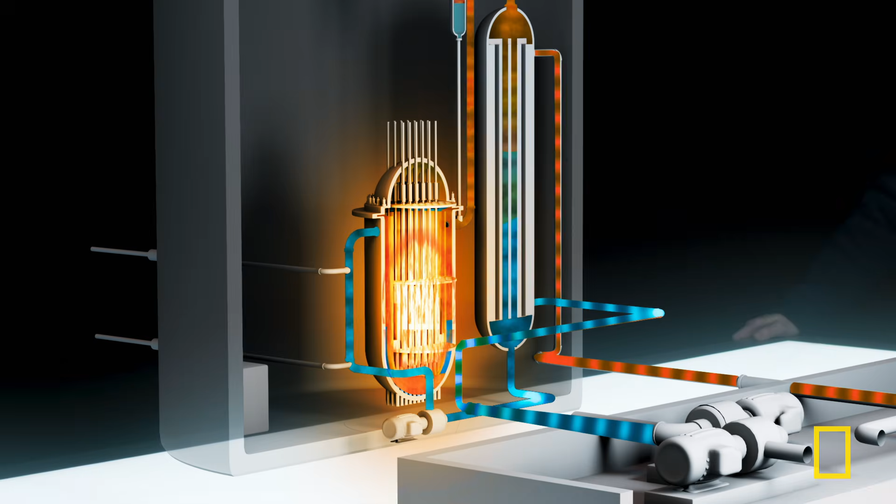The corium created at the Chernobyl disaster is still lethally radioactive 40 years after the incident. Pennsylvania is on the brink of nuclear catastrophe.

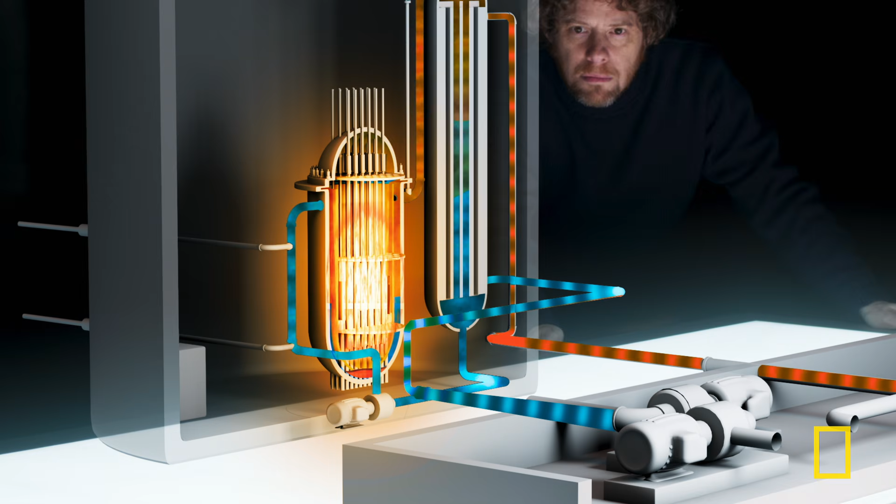At 6:18, two hours and 18 minutes into the crisis, the control room finally realizes the safety valve is stuck open. By this point, half the nuclear fuel has melted. Radiation alarms are going off all across the site. The plant operators are starting to get some inkling of how serious an incident this is. They declare an emergency. Three Mile Island is now just 30 minutes from total core meltdown.

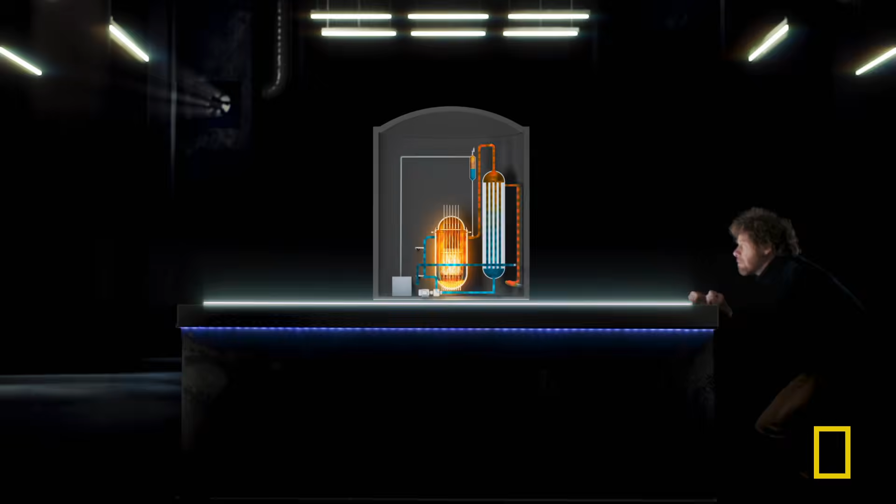It's only at this point that folks in the outside world start to realize just how dangerous the situation is becoming. There is just one option left: get water back into the superheated reactor at any cost.

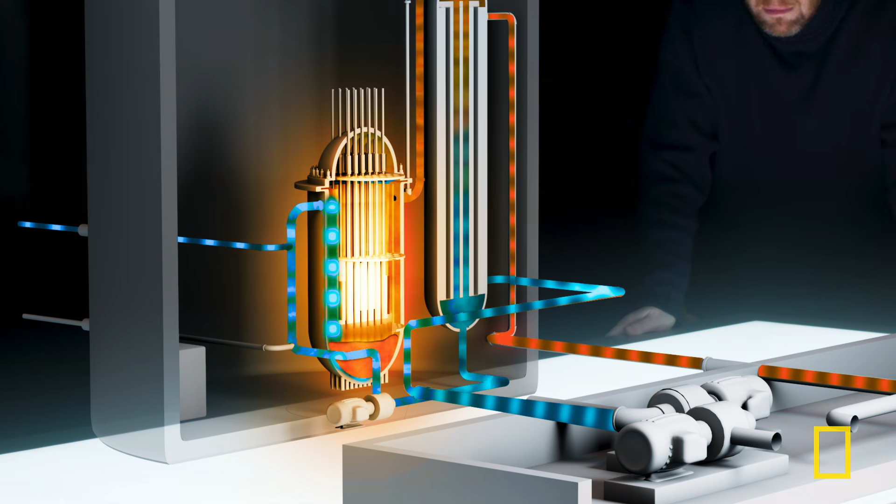The operators finally begin emergency cooling protocols. It avoids nuclear catastrophe by the narrowest of margins. But restoring a reliable continuous flow of coolant takes almost 16 hours. Finally, the temperatures in the core start to drop.

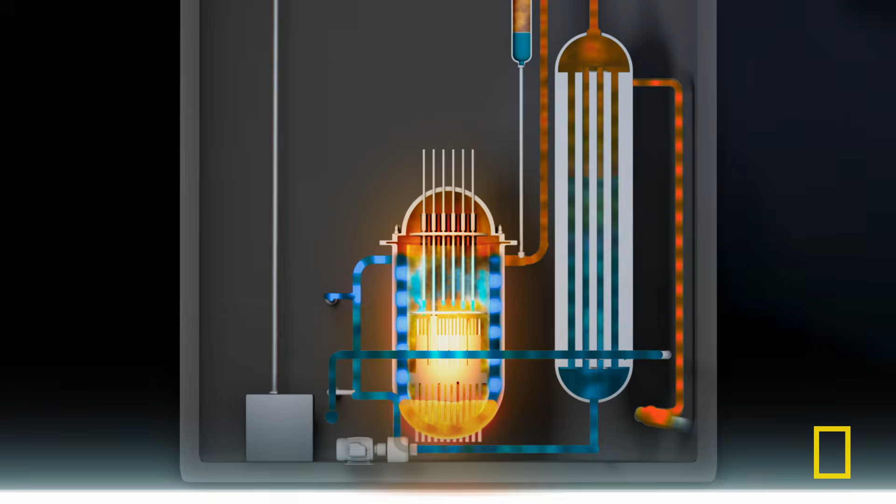By this time, the interior of the reactor has been reduced to 20 tons of radioactive slag resting at the bottom of the pressure vessel. Reactor 2 has been destroyed. It will never generate electricity again. We're really lucky it didn't melt through the pressure vessel and get out into the environment. If it had, it would have irradiated hundreds of square miles of Pennsylvania. Three Mile Island came so close to being a really serious nuclear disaster.

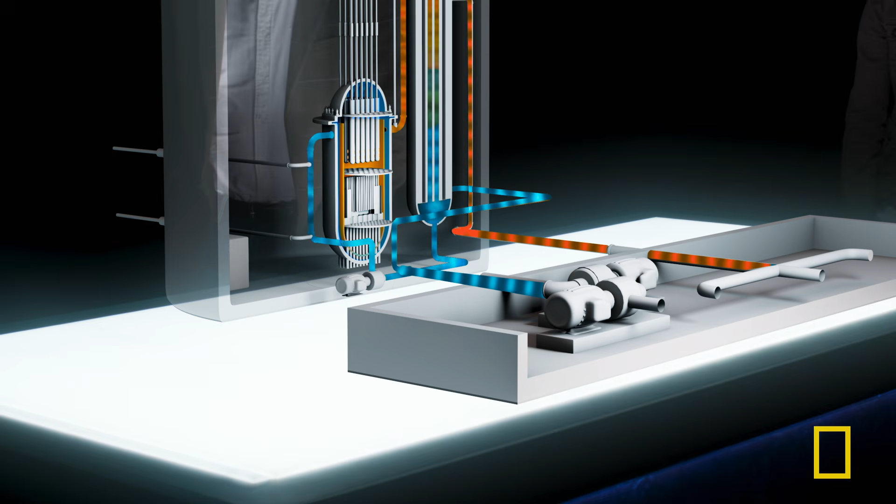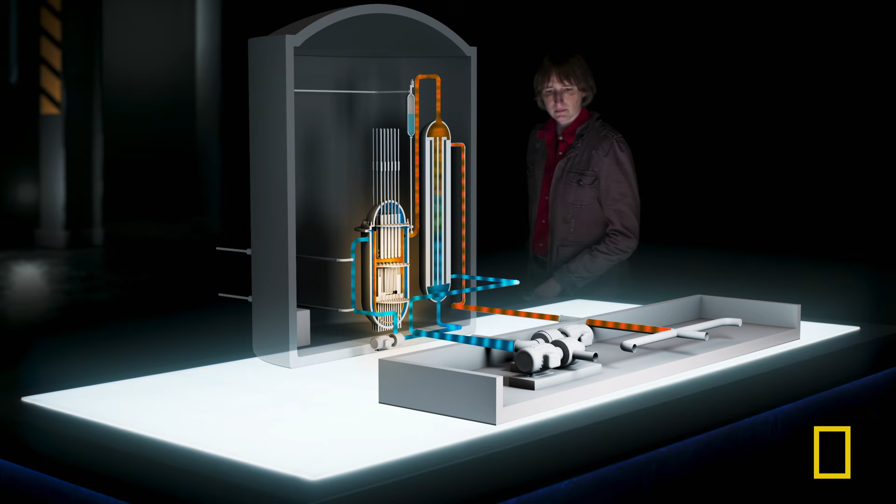We can now piece together the evidence and explain the Three Mile Island meltdown. At 4 a.m. on the 28th of March, a pump circulating water from the turbine stops working. The valves in the backup pumps are closed so they don't kick in. The reactor coolant instantly begins to heat up, and the pressure shoots up. The rising pressure automatically triggers a safety valve to open, and the control rods drop to shut down the core.

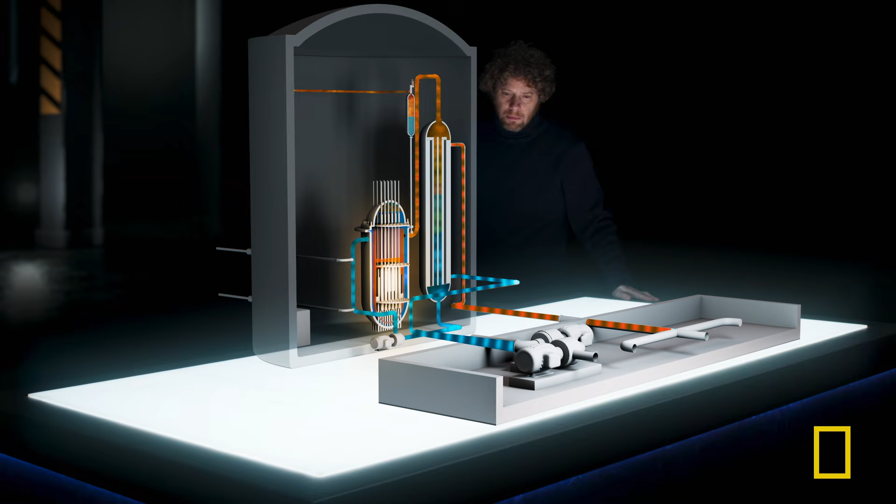With the nuclear reactor shut down and the pressure dropping, the safety valve should shut. The indicator light says it's shut, but in reality it's still stuck open. Cooling water pours out of the reactor through the stuck valve. This triggers the emergency cooling system.

Because the operators can't make sense of the indications they're getting, they shut off the emergency cooling system. They think they're just following protocol. They then drain even more reactor coolant. It is a disastrous call. Two hours after the crisis begins, the core starts to melt.

Three Mile Island very nearly becomes America's Chernobyl. I don't even know whether it's right to call this lucky, but this disaster could have been so much worse.

On the 1st of April, four days after the feedwater pump stopped, the crisis is officially declared over. The cleanup operation begins. 140,000 people have fled the area. People who fled their homes are returning. And there are even jokes now, including a T-shirt printed, 'I'm from Harrisburg and I glow in the dark.'

The cost of the cleanup is over $1 billion. It takes 14 years, and reactor number 2 is a total write-off. The real consequences that follow are the disastrous public confidence hit that Three Mile Island causes with regards to nuclear power. The American public never views nuclear energy the same way again. Even though no one was harmed in the incident and no radioactive material was released, over 100 nuclear power stations are canceled before the first brick is even laid.